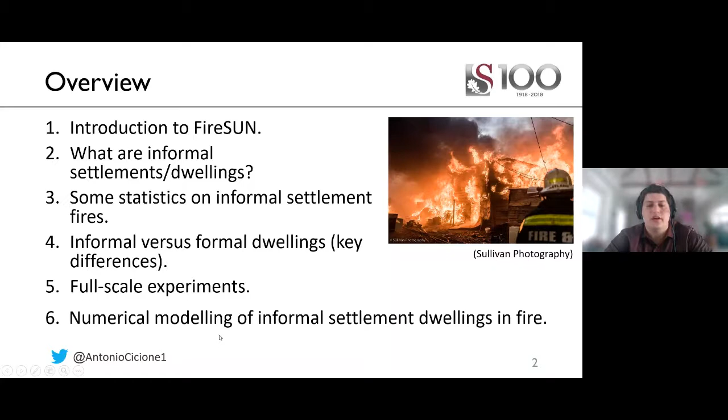So the fire research unit at Stellenbosch is called FireSUN, and we are the first fire engineering research group at postgraduate level in Africa. Currently, we have 2 postdoctoral researchers, 6 PhD students, and 9 master's students, all doing research in fire-related topics. Some of them: building response in fire, fire modeling, both finite element and CFD modeling, and also some full-scale steelwork testing. We recently conducted a 6x6 meter test on a novel sandwich floor system for the South African Institute of Steel Construction.

Then also looking at building design codes, specifically with regards to fire, to see whether our codes here in South Africa are up to date. And obviously doing a lot of research in informal settlement fires. We've recently started with some 3D printed concrete in fire, which is one of the areas I'm mostly involved in these days. And then design of industrial facilities in fire, and the behavior of CLT in fire.

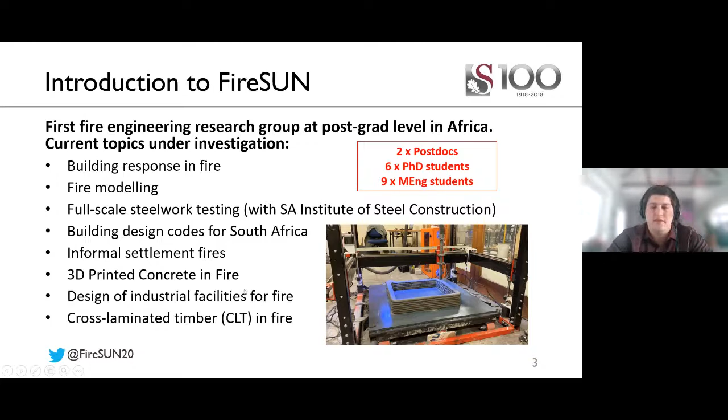Okay, so let's jump straight into informal settlements. Informal settlements are unplanned settlements built on land which has not been proclaimed as residential. Here I have 2 figures. The one on the left is a Google Earth image from 2014, and this open piece of land is in Cape Town, and just above it you have Cape Town International Airport. I'm not 100% sure if this was privately owned or government owned land, but what happens is someone will start building an informal dwelling there, and then the next person would start building.

And if the dwellings are there for a couple of days, legally you're not allowed to remove them anymore. And you can see within a single year, so this is 2015, the same piece of land has a full informal settlement with thousands of dwellings. With the settlement popping up this quickly, it's really not possible for the government to add any sort of formal infrastructure. So you don't have running water, and some settlements don't have electricity. The running water you do have is taps installed every few hundred meters, so each home won't have their own. You would have to walk to get water from a tap or a river nearby and bring the bucket back home.

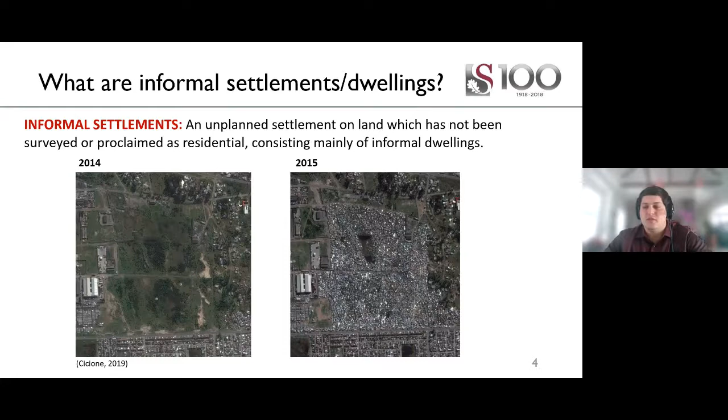Okay, so what are informal settlement dwellings then? They are the makeshift structures that are typically built from materials that are immediately available within the surroundings of the inhabitants. I've got three images of how a typical informal settlement dwelling would look. Here on the left, you can see how closely they are spaced. This is actually quite far for an informal settlement, and they can get really close, even touching each other.

If we look at the image in the middle, you can see that it's really poorly built in most cases, and it's not the best material. It is whatever they could find that's close by. So you have a lot of small openings. These openings create leakages, and through these leakages, flames can seep in or out, and it creates a fire spread mechanism.

If we look at this image on the right, you can see that the dwellings are typically lined with some combustible material, and that's for insulation because you have really thin sheets being the boundary of the compartment, so they are really cold in winters.

And then in terms of the fuel load, it really ranges. Here we only have a bed with a couple of clothes, so it's probably not a very high fuel load. However, you do get dwellings where people store spirits and gas canisters and run a small local business out of that, so that can be a very high fuel load.

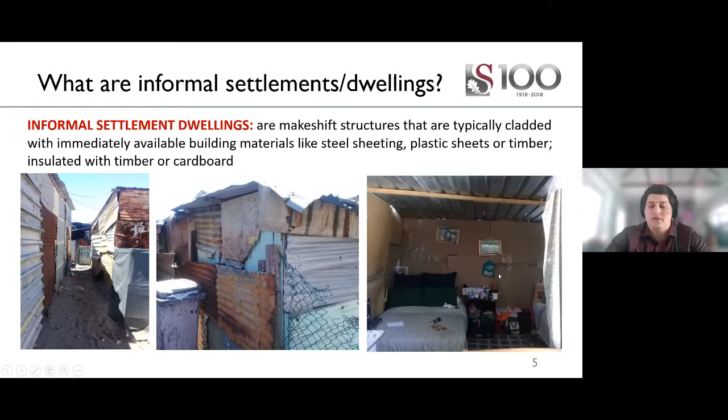Okay, so if we quickly look at some statistics regarding informal settlements and informal settlement fires, we currently have about 7.5 billion people in the world, and of those, about 6.3 billion live in low and middle income countries, and of those, approximately 1 billion reside in informal settlements.

It is, however, estimated that the population residing in informal settlements will grow substantially in the coming years. By 2050, we'll have 1.2 billion people living in informal settlements in Africa alone. So it's really going to increase a lot in the next 30 years.

If we then look at fire and fire-related death, currently it's estimated that we have approximately 180,000 to 300,000 fire-related deaths per year, and of those, approximately 95% occur in lower to middle income countries.

If we look at all other natural hazards, which take about 90,000 lives per year, you can see that fire is actually more than double that. So fire is quite deadly and quite dangerous, and a lot of those deaths occur in low and middle income countries, unfortunately.

In South Africa, we have about 5,000 to 6,000 recorded informal settlement fires per year. These are only the fires that get reported to the authorities, so there might be more. This is about 14 informal settlement fires per day in South Africa, which is quite a lot. And these fires can be really big, 2,000, 3,000, 4,000, 5,000 structures in a single fire incident.

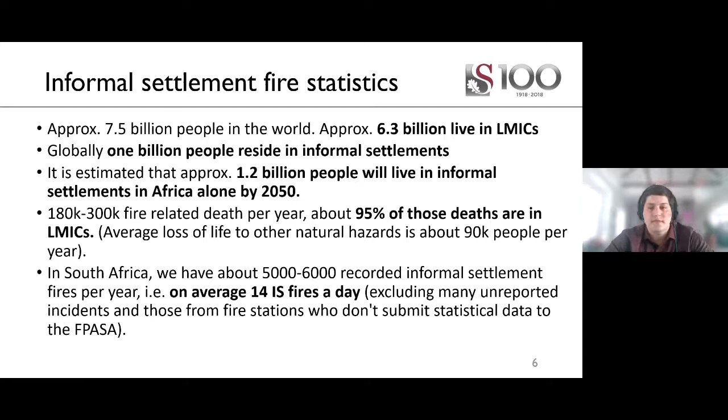Okay, so this is just a quick case study, not very detailed, just a quick overview of the Imizamo Yethu fire. This occurred in 2017. This particular fire destroyed almost 2,200 structures, leaving about 10,000 people homeless.

The fire started over here at this star, and the wind direction at that moment was up the hill in this direction. As the fire reached the top of the settlement, the wind turned, going along the foot of the mountain. It then reached these eucalyptus trees, which made the intensity of the fire so much worse. The wind changed direction again, and it started spreading down, almost jumping into the formal neighborhood over here. These reddish roofs are the formal dwellings.

This green line over here is the only access road into the settlement. It's a very narrow, very steep road, and I'll show you a picture of that now. As soon as you have a fire, everyone starts bringing their belongings to the road to try and evacuate and save their belongings. The road gets blocked really quickly, so there's no way for the brigade to get in there.

So what often happens is they'll stop at the boundaries and start running on top of the roofs to actually get to the fire. And what also happens is they are strategically fighting the fire front, and a resident, just as a result of lack of knowledge, would see, okay, they're fighting the fire over there, but my house is over here and it's going to get destroyed.

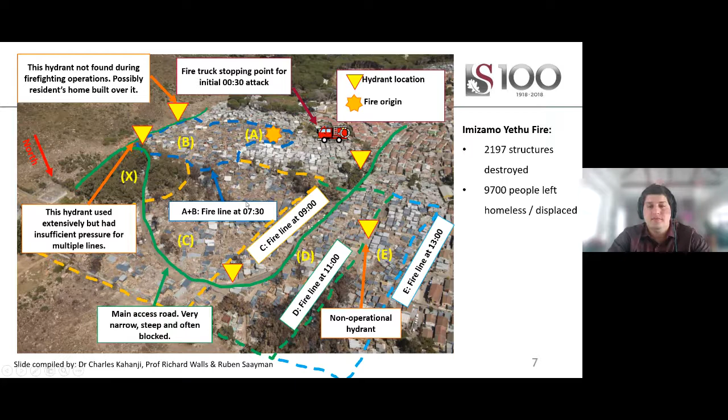For people living in informal settlements, that's not the case. You lose everything when your house burns down in a fire, and you have to start building straight away, because where are you going to live after this? Because your house is destroyed, you've got nowhere to go. And if you don't build straight away, someone else will build on your piece of land. So it's really not nice, and it's something they have to do, unfortunately.

And then as he got down to go grab more water, suddenly there was a big explosion. So a gas canister or something exploded. Luckily, he wasn't on the roof anymore, but yeah, it is very dangerous on top of the roofs where you can't easily evacuate.

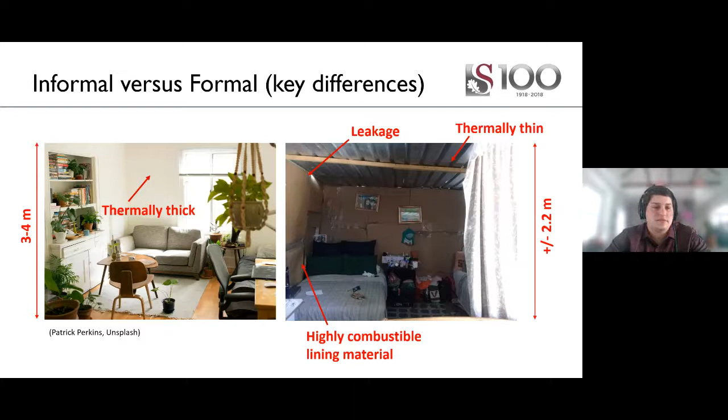For formal structures, we all know the more material burns, the more material gets involved in the fire, the more combustion gases are released and the more hot gases are released. And these hot gases then accumulate at ceiling level. And as soon as we have enough hot gases at ceiling level and the corresponding radiation to floor level is enough, we then get to a point where we can have flashover. So which should happen any minute now.

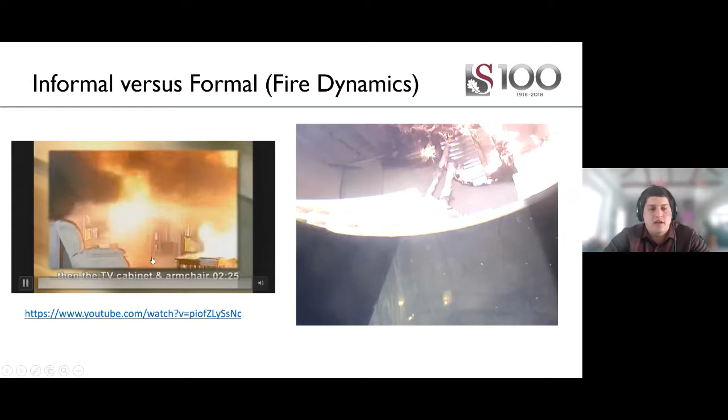We can see that's quite a nice hot layer at the moment. Now we have flames in there. We can see some of the material starts to pyrolyze, and we then have flashover. So let's just have a look. Yeah, pyrolysis and then flashover. Okay, and that's 2.5 minutes. That's fairly quick for a formal structure.

If we then look at an informal dwelling, I don't have a video that's as nice as this one for informal settlements. So this is one of our experiments. We have a GoPro inside. It's lined with cardboard, and you only have 2 timber cribs in the middle of the dwelling. So this is approximately 30 seconds after ignition. And ignition occurred here at the very top of the dwelling. So this is the camera looking from floor level up towards the ceiling.

Opposed flame spread is a lot slower than concurrent flame spread, so we know that. So this is ignited at the top, so you have slow development at the beginning, but you'll see it's still relatively fast. If we ignited this at the bottom, it would have been a lot faster to flashover, but let's have a look. So you'll see the cardboard burns, and then as soon as you have sufficient heat, all the cardboard will ignite. So if you have a look here at the left, you'll see the rest of the cardboard igniting, and then once we have sufficient cardboard burning, it's just flashover straight away.

So the energy from the cardboard or whatever combustible material is used for lining is really enough to cause flashover, even if the hot layer isn't 500 or 600, what we usually use for formal structures.

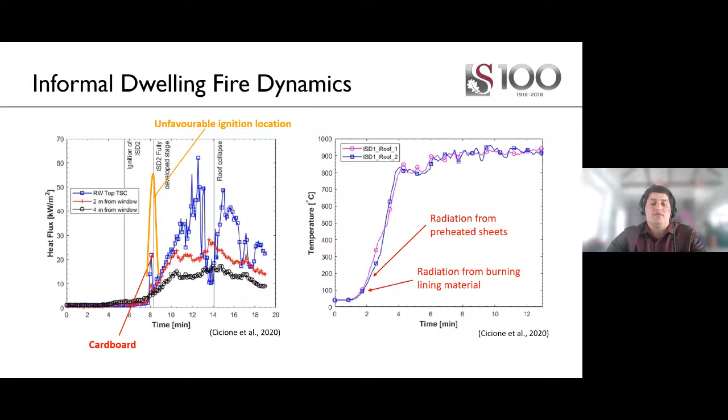Okay, so let's look at some of our experiments. So here we have two experiments, so 3 steel-clad dwellings and 3 timber-clad dwellings, and we just wanted to see what the main differences are between the steel-clad dwellings and the timber-clad dwellings. For the steel-clad dwellings, the main spread mechanism is flame impingement onto the cardboard. The flames then creep down the cardboard. As soon as we have enough cardboard burning, we have flashover.

And then for the timber dwellings, this fire was really intense. We actually scared the fire brigade on the day. We were scared ourselves. We thought, okay, we're going to burn down something here at the back. And we had these firebrands going everywhere. We had a fire whirl, and everything was just burning here. So it is really intense. And you'll find here that as soon as the dwelling reaches a fully developed stage, the timber cladding will create some gaps. You can see it over here. And then very soon after that, you'll have the entire dwelling burning like you have over here. So this is really not great for fire and the timber-clad dwellings.

And if we think about this, then also other fire spread interventions, we can think that they won't work if we see this. For instance, a lot of people have proposed intumescent paint. So even if we forget about the fact that everything should be perfect for you to apply intumescent paint without it falling off, so you have to have clean sheets, it needs to be prepped properly, and then you can apply the intumescent paint and it won't fall off. Let's say everything was done perfectly, you still have the gaps as a result of the corrugation, and the sheeting will still buckle and create gaps. So you'll still have flames impinging onto the cardboard even if you have intumescent paint swelling up, right? So it's just not a good solution for informal settlements.

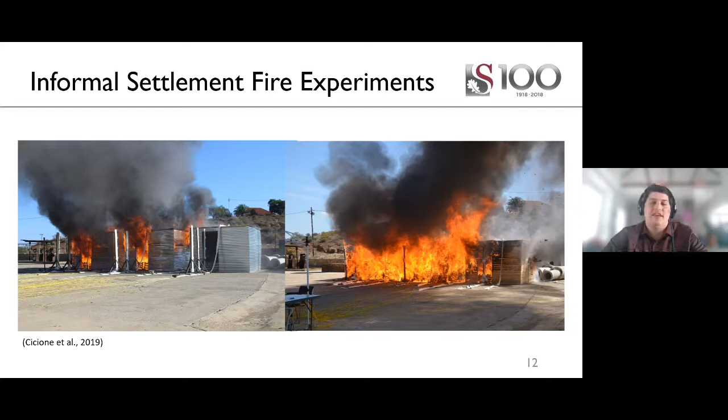Okay, so we went a bit bigger, and we did a 12 dwelling experiment. So initially we wanted the wind to come from this side, going top left to bottom right, and unfortunately on the day it happened that the wind was the other way around, and we set up the experiment to ignite these two dwellings simultaneously, and we still went ahead with that. So these results aren't published yet, but hopefully it will give us some very good insights regarding how fire spreads against the wind versus how fire spreads with the wind, which we'll see in the next experiment.

So something that's quite interesting here is that because we ignited these two dwellings at the same time, we did a small variation in the boundary conditions between the two dwellings. So between these two dwellings, we actually stuffed all the leakages with ceramic blanket. And then between these two dwellings, we just left the openings or the leakages like you would typically do in an informal settlement. And it was actually interesting to see that fire spread did not occur from this dwelling to this dwelling, but rather it spread from this dwelling to that dwelling to this dwelling. So just covering the leakages makes a huge difference, even though the steel sheet that separates the two dwellings still got really hot. The fire spread was quicker this way around than by conduction through the sheets.

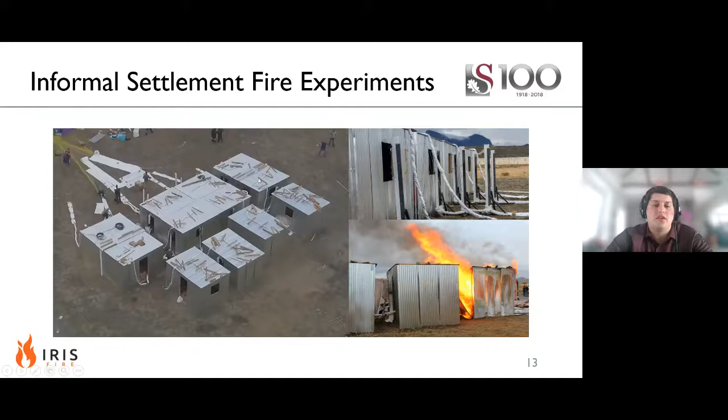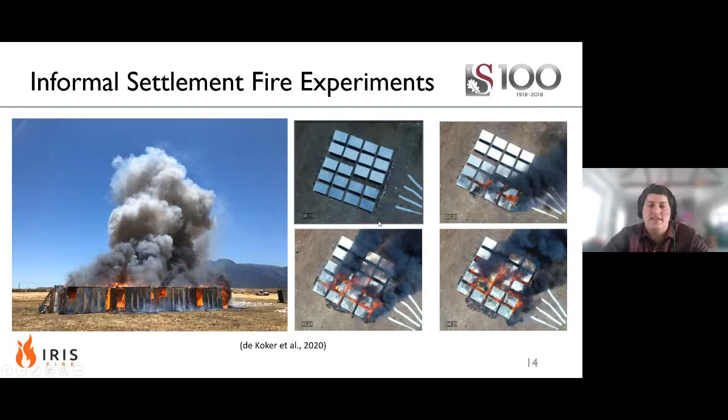Okay, so then we went a bit bigger, and we did the 20 dwelling experiment. So these results are published, so if you want to have a look at that, you're welcome to. We ignited the 4 dwellings here simultaneously to create some sort of fire front and see how it then spreads through the dwellings. So I'll show a video of that.

So yeah, as I mentioned, we ignited these 4 dwellings at the same time. The small settlement was made up of timber-clad dwellings and steel-clad dwellings. So the highlighted ones are the timber-clad dwellings.

And if you are willing to comment, in the comment section, it would be good to see what you think the dwelling with the highest temperature would be. It would be quite interesting to know what your thoughts are before we look at the results. So yeah, these are the timber dwellings. If you want to comment, or you can just think about it on your own. So we have row 1, column A. So you can just say A1, for example.

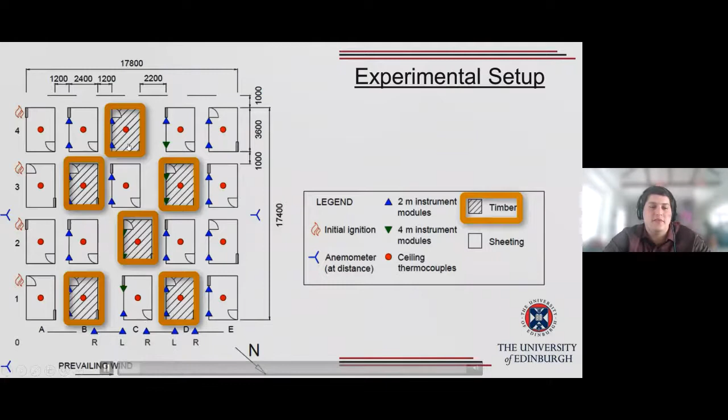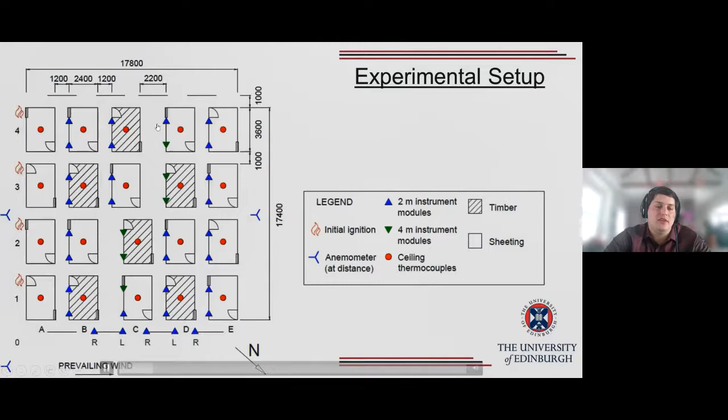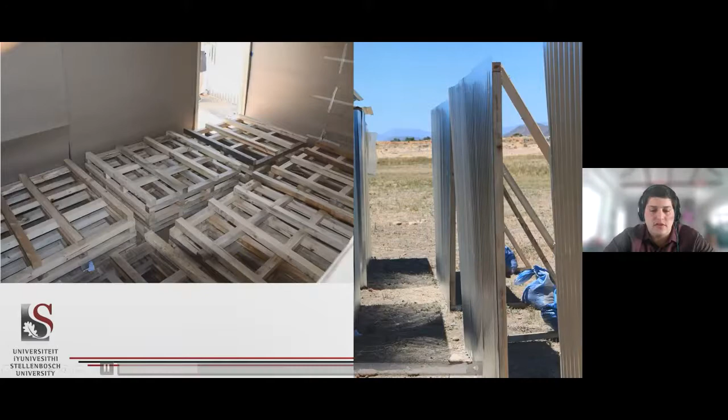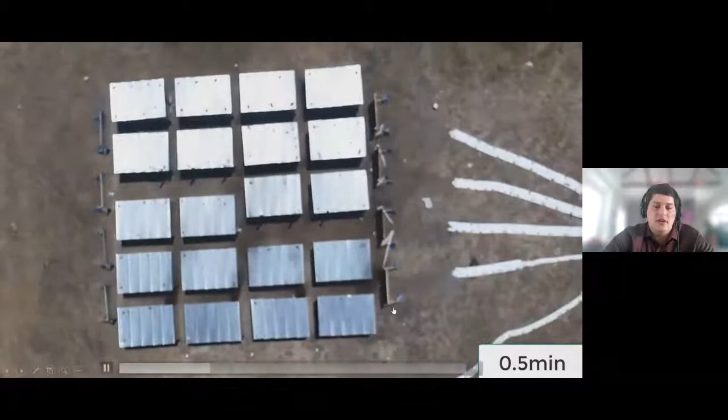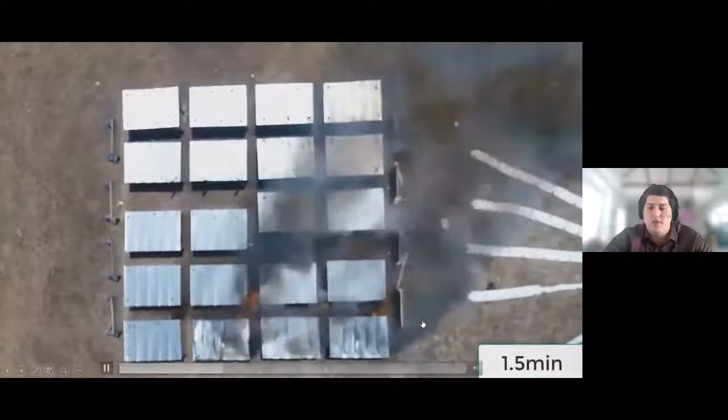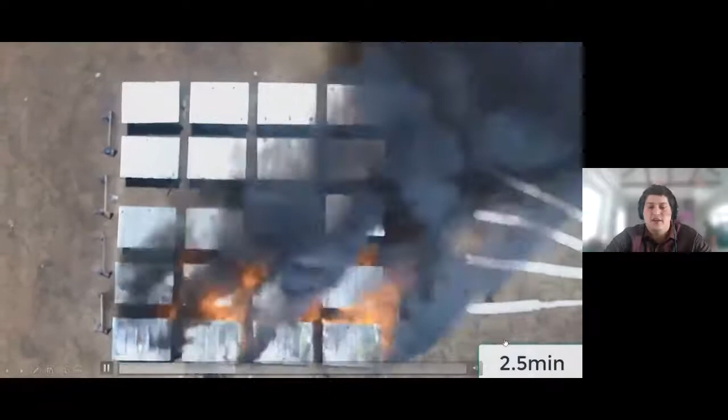Okay, so let's look at the drone footage. Here we have an overhead drone. So we ignited the 4 dwellings. This video is now times 10 the speed, but you have a real time stamp here at the bottom right. So at 1 minute, we already have the first dwellings reaching a fully developed stage. 2 minutes, we already have the second line of dwellings ignited. 2.5 minutes, some of the third line. 3 minutes, basically everything in the third line ignited.

3.5 minutes, we are getting to this dwelling igniting. 4 minutes, we have both of these ignited, and I think that one as well. And at about 5 minutes, we have all of the dwellings involved. So that's quite scary, 5 minutes, 20 dwellings. And you'll see that some of the timber-clad dwellings are starting to collapse. They burn for about 5 minutes. As soon as the timber planks burn away, you have some sway collapse because they don't have bracing anymore. And the steel-clad dwellings take about 7 to 10 minutes to collapse.

The interesting thing to note here is this dwelling still standing over here. This was the steel-clad dwelling in between 4 timber-clad dwellings. Initially we thought this dwelling was going to go like a bomb because you have the 4 timber dwellings surrounding it, and there's going to be so much radiation to this dwelling. We really thought this was going to be the worst case, and actually the temperatures in this dwelling were the lowest. I think it's because the timber-clad dwellings were burning and consuming all the oxygen, leaving almost no oxygen for that steel-clad dwelling. So the burning is less severe in that.

So this is just a side view of the experiment. Here you can see how the timber-clad dwelling looks. I think another one over there. There we have a timber-clad dwelling. So they burn away pretty quickly. And then as soon as the cladding is burned through, you have collapse.

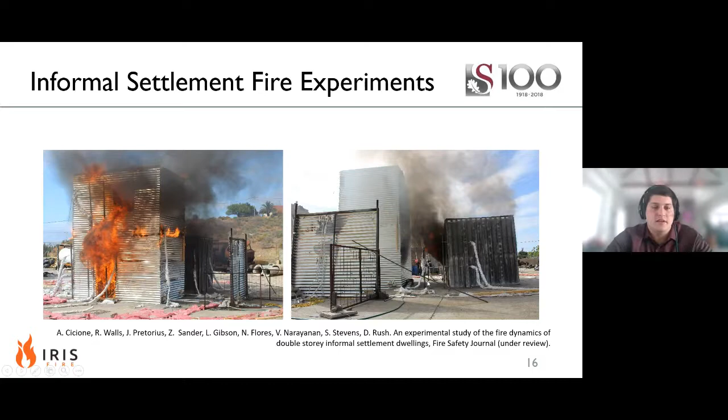Okay, so from our results, we can try and validate or benchmark some of the current equations we have within the fire engineering community. So we actually found that the normal equation for radiation, so we have the Stefan-Boltzmann coefficient, configuration factor, emissivity, and temperature of the emitter, actually predicted the radiation that we measured during the experiment quite well. And then also using the flux time product, we could predict the time to ignition with our experimental results pretty well.

And then the hope is that we can use some of these equations, we can generalize them and simplify them, and ultimately use them in some sort of statistical fire spread model where the results can actually be useful for local municipalities and firefighters. But just then, as an interesting thing that we found using these equations were critical separation distances. So how far do these dwellings need to be apart for them not to ignite?

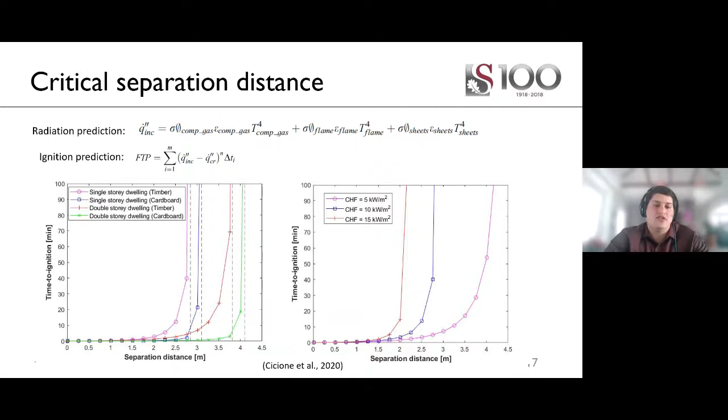Okay, so like I mentioned, the hope is that we can start using these equations in statistical fire spread models to produce risk maps of real informal settlements, and I'll show you some of the work that we've been doing regarding that. Okay, so some numerical modeling that we've been doing. So here we have those experiments that we did last year, where we had 2 dwellings that I just showed you, and we had a lot of wind, and we're trying to see whether we can reproduce the experimental results and whether we can capture the wind behavior and the fire behavior accurately.

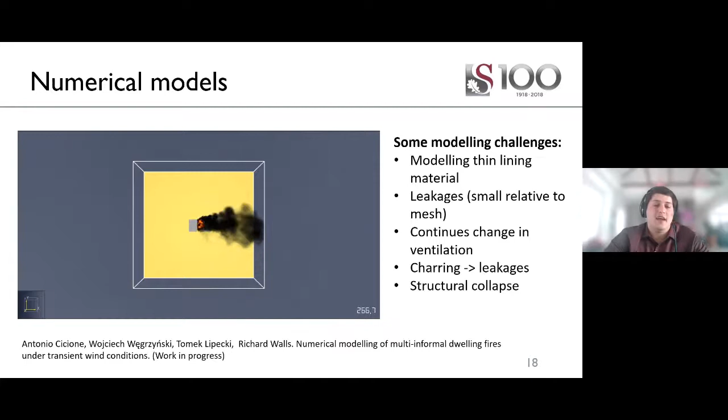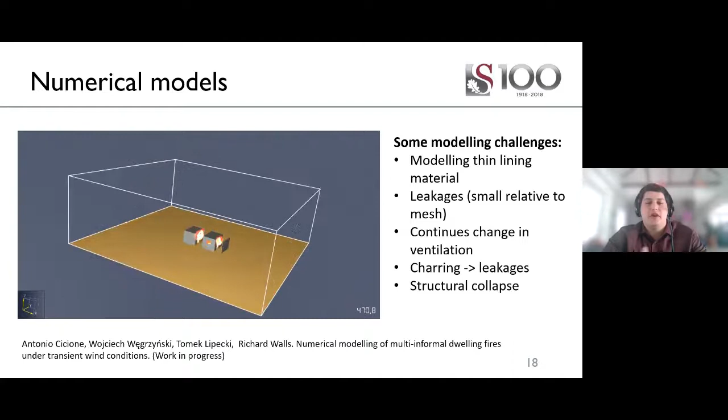And I have to say, I'm actually quite impressed with how well FDS is capturing this. It's surprisingly well. It always feels weird when a model actually captures results, right? But a lot of people will ask me, why would we want to go as complex as FDS for informal settlement fires where you have so many unknowns already?

And the answer to that is, one, if we can benchmark FDS against all of our experiments, we can look at parametric studies and then really try and identify the parameters that influence fire spread the most. So that's where we then need to focus on. We can also get outputs from FDS that we can use as inputs for statistical fire spread models that can ultimately help us produce accurate risk maps.

However, there are some challenges with FDS specifically. I'm not sure if we'll have the same challenges with other CFD software. For example, in reality, we have very thin lining material, the cardboard being a few millimeters. However, in FDS, it's not realistic to have a mesh size that's 1 millimeter or 2 millimeters. It's just not practical. So you have to have the cardboard being thick, at least 1 cell size thick. And this then creates challenges regarding how quickly it spreads over the surface and how long it takes for that cardboard to ignite.

Then also simulating the leakages, that's also difficult because you have a lot of small leakages and you can't make the mesh size that small to accurately model the leakages. We also have a continuous change of ventilation, so as sheets buckle, it creates openings, and that's really challenging to model.

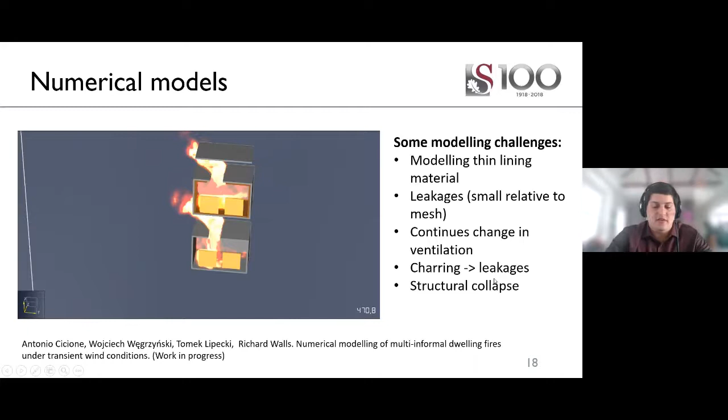Okay, yeah, so how would a statistical fire spread model work, and what would we be able to do with that then? So we had a look at this, playing with submodels of B-RISK, and trying to randomly populate settlements and see what we get. So we use the radiation and ignition submodel of B-RISK, and we benchmark that then against the 20 dwelling experiment, the triple dwelling experiments, the Imizamo Yethu fire, and we added a wind feature to B-RISK to see whether we can predict fire spread in a slightly easier way, and then we can run the simulation 1,000 times, for example, and try and get an average spread rate.

However, a lot of work is still needed to validate and to benchmark statistical fire spread models, and some of the interesting stuff that can also potentially come from this is that if we, for example, randomly generate a settlement and we run the fire spread scenario and we record the fire spread rates, and we also then record that randomly generated settlement's spatial metrics, we can then start to see which spatial metrics, for example, like density, edge density, distance to first and second and third nearest neighbor, which of those spatial metrics become indicative of

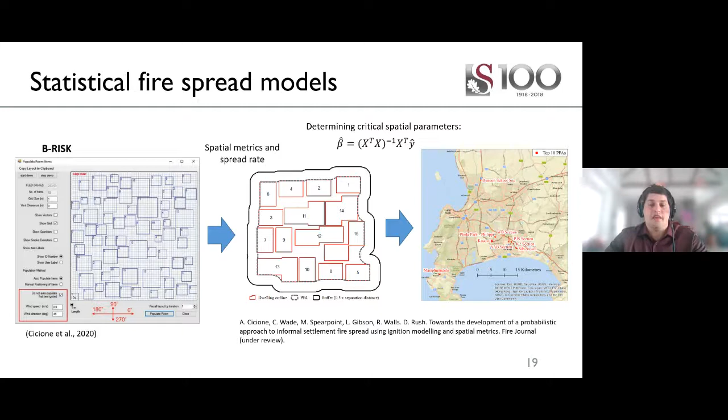high fire spread rates. We can then run the spatial metrics, for instance, for Cape Town, and we can then start highlighting which informal settlements are most at risk to high fire spreads, or which areas in particular settlements are most at risk to a higher fire spread rate. And hopefully these are then some outputs that firefighters and local municipality can actually use, but we still need to do a lot of work to validate this and to refine this so that it can actually be used in practice.